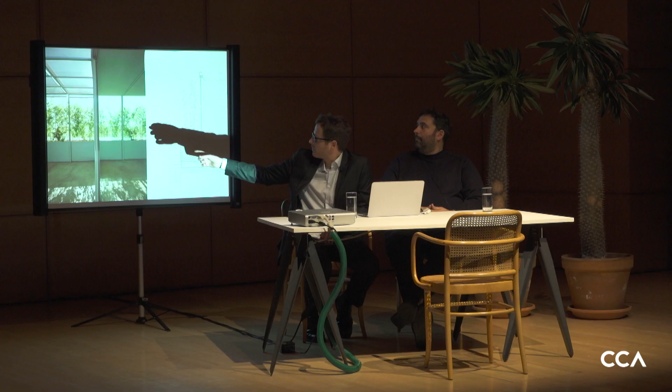Behind those plants is the pavilion I want to talk about. The pavilion sets back from the edge of the building in order to create a perimeter of plants that filters the light. We designed the same structural design for two kinds of places: this filtered exterior, and also a gardened interior.

Its simplicity puts it closer to a new version of the primitive hut, which is not built on the soil, but on the top of the city, in the middle of it, with no urban references, with no preset rules or use, just more like a natural oasis related to a new kind of hedonism.

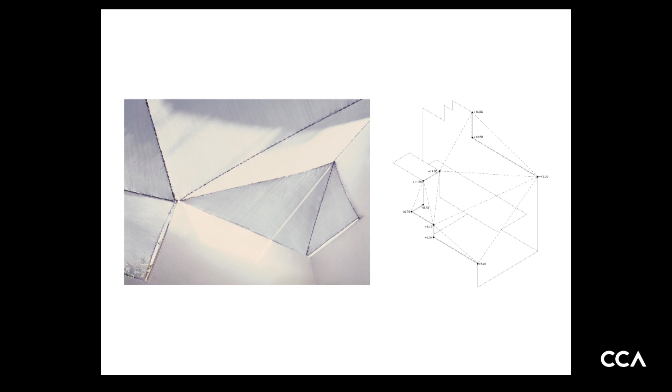Sometimes imperfect places like this discontinuity in the urban fabric can develop new opportunities. Again, what we see there is a new pavilion on top of an existing house. So we are not working on an empty plot, and we are not working with any precise use. We use a very malleable element to absorb every accident, so the discontinuity of the neighbor's wall stimulates the formalization of this shadow device.

This is how this device takes the higher wall, and we are trying to use the same attitude in the previous project relating to obsolete infrastructure. What we see here is an old water tank that, if we remove the top cover, we can now call a pool floating in the air.

This is how the city changes looking through the project. We as architects are able to build passive machines that produce momentary alteration of the weather. We don't need too much matter to do so.

We can create a breeze that goes over there. We can cool down the air. We can bring the vegetation humidity inside. We can do all that with very cheap materials. So there is a totally different approach from traditional construction techniques. It's not like building a wall and then adding a window. Here, the elements start to share responsibilities, and that's why they start to become lighter. We can have this totally glass room just because we have a shadow device on top of it.

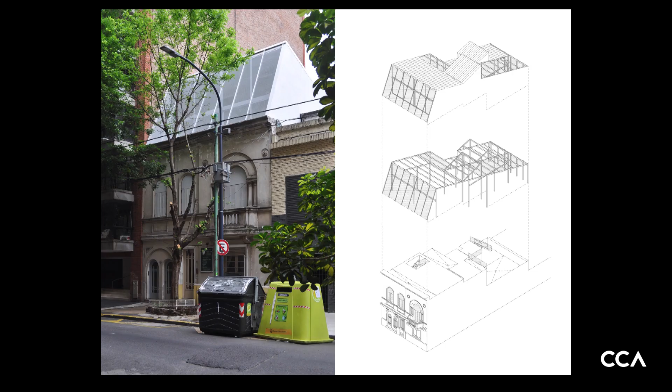So again, those are the plots I'm talking about. They are not expected places to build on, but sometimes you need to look for unexpected places to project unexpected ways of living. So this pavilion presents itself just like a ghost roof, a roof that the house never had.

So now our earth crust is the urban fabric. If you work on an artificial topography, you can find sloping new ground in pampas, extremely plain soil. This continuous and sloping roof that we see over there is a reaction to this condition.

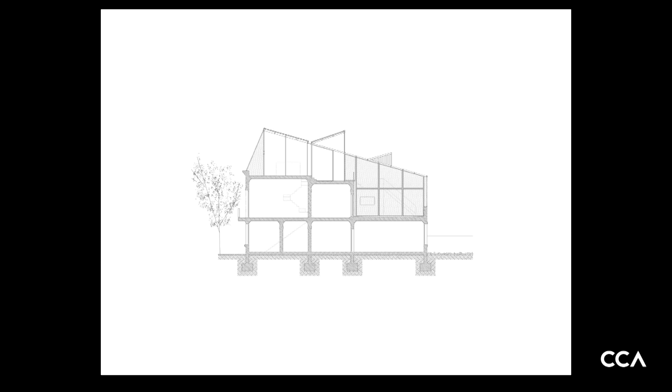Again, the typical house already exists, as we can see there. So we are only adding a big room with no specific use, structured by 3 patios: one on your left, another behind, and the third in front of us.

So this metal mesh and glass, the concrete floor, and the same steel structure tend to dilute the differences between interior and exterior, just to make you live floating inside the block.

So finally, when you manage to confirm the fertility of this new territory, and you finish understanding the hidden potentialities that it contains, it's time to look to the big picture again.

We believe that the air plots are key elements to develop a new kind of social houses. What we see here is a strategy that explodes the isolated housing block and prevents at the same time the ghettification. It's a strategy that promotes social integration through integration of different architectures.

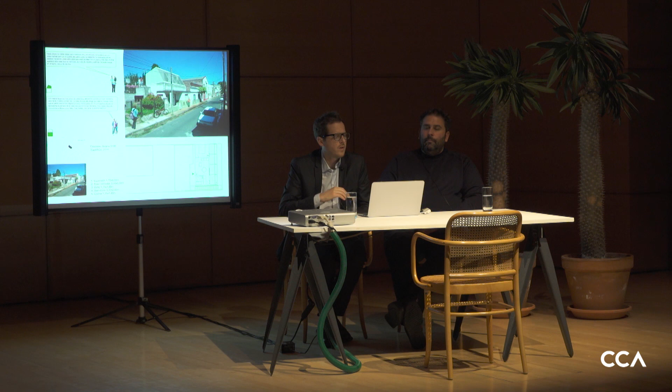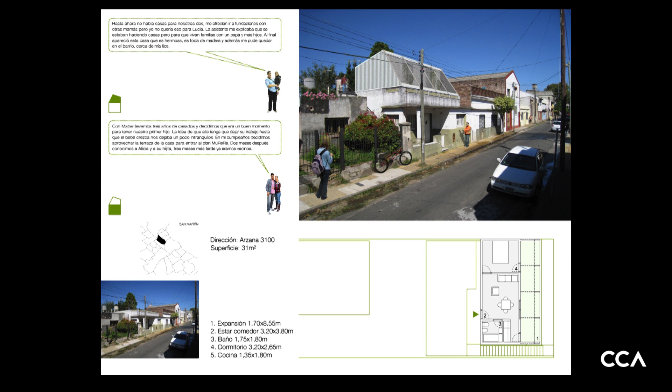Just like the mutualism in the Animal Kingdom, it's completely necessary to generate a new contract between the two parties, so the new inhabitants can be integrated into a consolidated social network, while the owners of the existing homes benefit from the air rights.

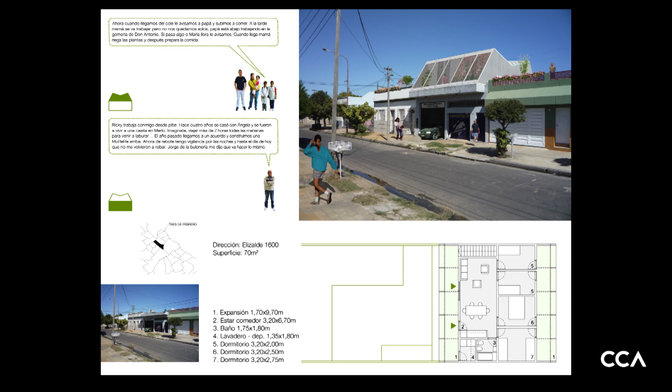Urban activity can grow by incorporating housing in service areas. You can see how the plants grow at the same time that the roof of the existing house grows.

Or the elderly can avoid moving from houses where they formed their family, by adding new life on their rooftops. As you can see in this image, we don't believe that social architecture really exists.

The architecture we propose here is identical to the previous one. What we do really believe is that there is a potential of social change in the detection of new territories.

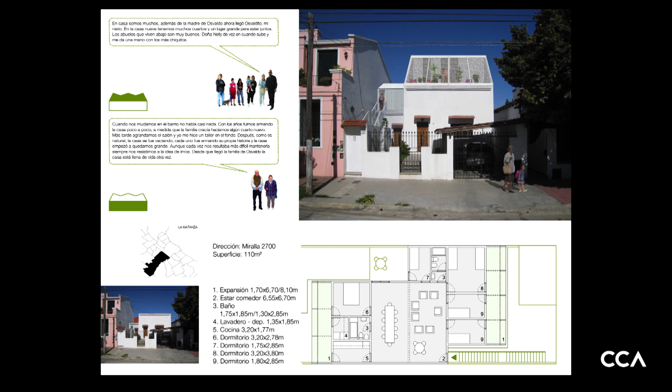Okay, so if the first chapter Marcelo was talking about is about finding new plots in the air where apparently there weren't, then this new chapter is about how we can find, or how we can subdivide and find new plots inside the other plots.

But for this to happen, you have to have some affections between the actors inside the same plot. So these two small projects that we are going to present can exist because of the solidarity of the families.

In these cases, the families were able to share part of their heritage with their children by contributing with a piece of land and with part of the needed budget. So here we are replacing the first initial investment with the contribution of the family.

As you can see in the neighborhood here, you can have a production factory in the ground floor, and then upstairs it's the own home of the family.

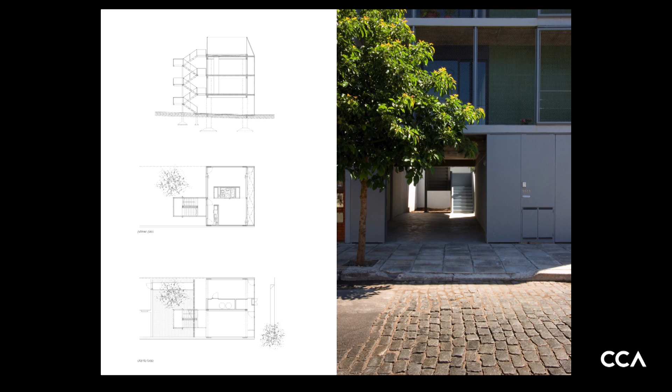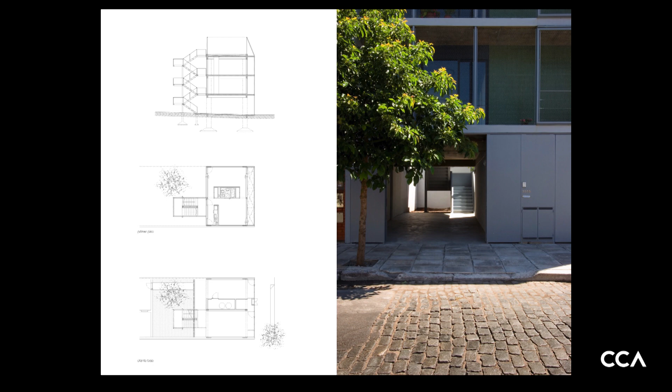So on the ground floor, they have a shared place with spaces for cars, and the place where people and workers go to the back of the plot for the factory. But also they have their lemon tree that was very important for the family.

This lemon tree was a micro landscape episode that was very significant for the family because they had their days below the trees because of the fruit, and that was for us like the beginning of a dialogue - a dialogue of form and a dialogue of colors and the atmosphere of this small courtyard.

But we also knew that for this construction, which was very, very economic, we had to build with a material palette that can resist long terms without maintenance.

And in other terms of economy, like this narrow building with this connection for the air - also the economy of means is always the best path to be economic.

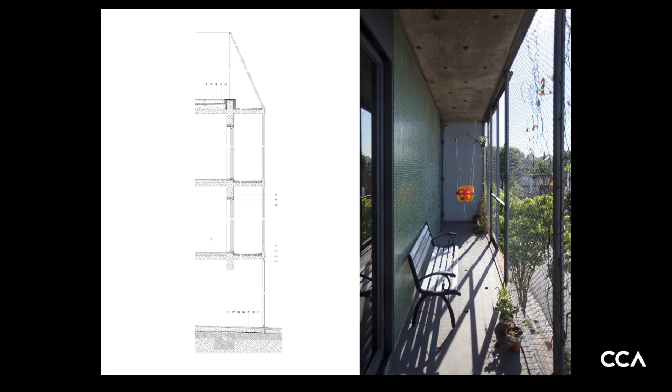In a similar essay for these houses that dialogue in a new plot, in an existing plot, is for this house, which in this case the new house is at the front of their parents' existing house, just where the garage was located.

In the house I explained before, there was a kind of critical situation because work and a factory live all day with a domestic life. In this case, it's how to live between two families that need to be together because of the contingency of life, but they also need their own intimacy.

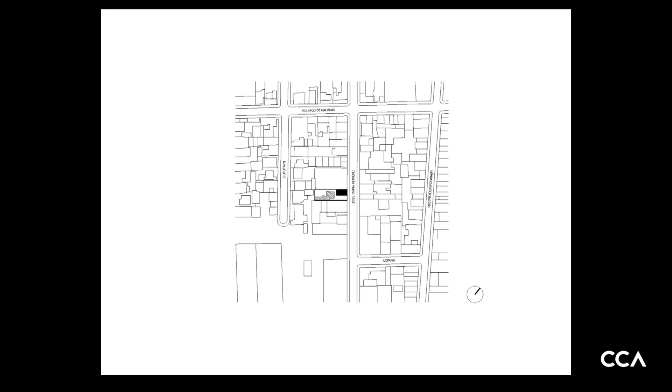So this is a typical suburban situation of Buenos Aires, where tertiary buildings coexist with big open portions of land and small houses. By rotating the new house, it is possible to conquer long and open views and connect the air delivered by this piece of landscape from the neighbor with the new house and its private courtyard.

So in the ground floor, they had this. They have some needs for a connection. Here, this is the existing house, and from this path, they can access both houses. Also, the cars stand there. But this is all again the piece of landscape that you can see.

It's like 4 meters by 8 meters. It's something very small, but it's very carefully and lovingly maintained. It's very important for them. So this small landscape started to structure their lives in the everyday.

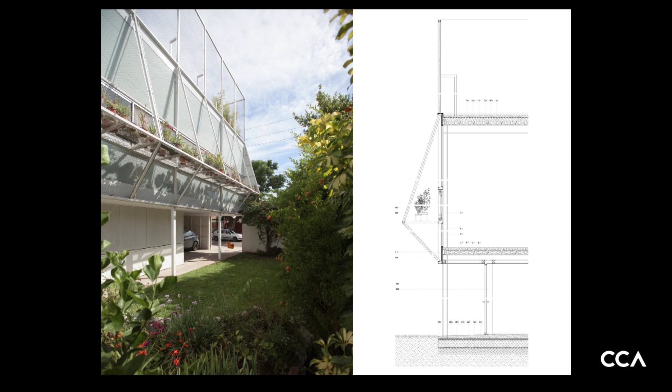So by elevating the new house, we also can provide some intimacy for the main rooms of both houses. So accepting the challenge and taking care of how the new building can join this ongoing conversation that started with this little garden. So again, very simple details.

And the interior of the new house is a big portion of air where the furniture plays a very important role to define how it is used.

And the big glass front is organized with two types of glass just to provide the required intimacy needed for both families.

Then again, in the last room, the terrace is an open-air observatory where both families can share an experience and rediscover their own neighborhood, this time from another point of view that was not shown before.

So, as Sebastián commented in the introduction, Buenos Aires is made of plots that facilitate its regeneration for various reasons that we are thankful for. There is a solid confidence of the citizens in their architects. So if you agree to take certain risks, you can participate in the construction of your city.

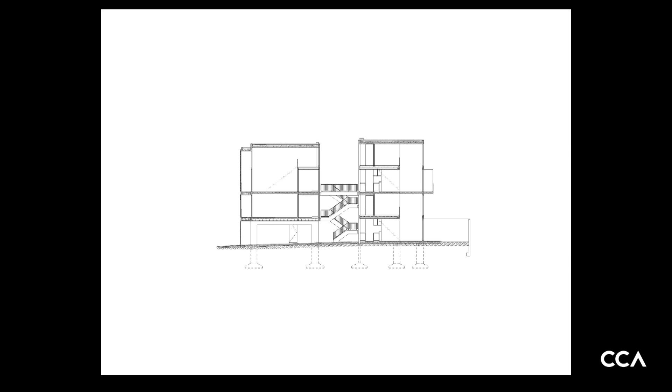What we do is, in this first one, we choose an area of the city where it made sense to build small units, units that were in tune with the small investors we were able to group at that time. It is a very simple and economical building where the first block rises and connects the street through a circulation patio.

The interesting thing about this method of work is that the first thing that appears is the project. The architecture then has the possibility of placing itself between your private agenda and the public's needs, using Richard Rorty's word.

If this balance of private obsessions and public needs is not 100% balanced, the construction of the project does not happen, or the architecture has no interest. This space speaks of this double condition.

Some can see here a parking lot, another a common ground in continuity with the public space. Some may see here a space for home or a place for working, while we only care about creating spaces that increase our freedom, unrelated to any specific use or any specific inhabitant.

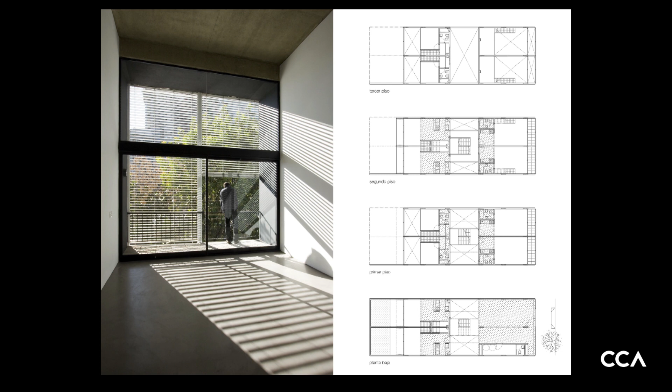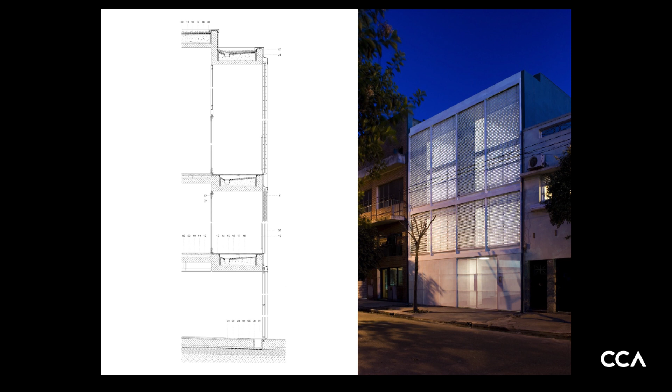We ask ourselves how a building of which we don't know its use should be presented to the city, or how this programmatic uncertainty can positively impact its formalization.

This is another kind of curtain wall. It's a curtain wall that has curtains in the front. It has glass 1 meter behind, with vegetation in the middle.

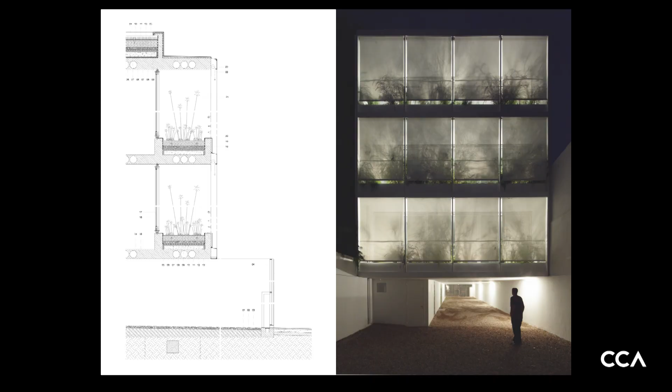The last studio that we did together at the University of Buenos Aires was called Workshop for Project Techniques. We believe that the project is a form of knowledge, that you can learn and use other architects' design techniques, knowing that they won't fit perfectly in your present scenario. So that little difference produces a small forward movement, always rooted in the discipline, but stimulated by the day.

So if at the end of the day, the only thing we are offering is a modified volume of air, how can we project the conditions of that interior atmosphere? So the design of the envelope becomes a key moment of the project.

So in this case, the shadow device and the vegetation are incorporated, so the air enters this room, lowers its temperature, and increases the humidity.

This programmatic uncertainty is opposed to a clear spatial specificity. For us, this is the condition to promote a creative way of living. Also from this point of view, the space organization is dramatically simplified. You can come back to it with a totally different perspective. For us, it's a shortcut to structure envelope.

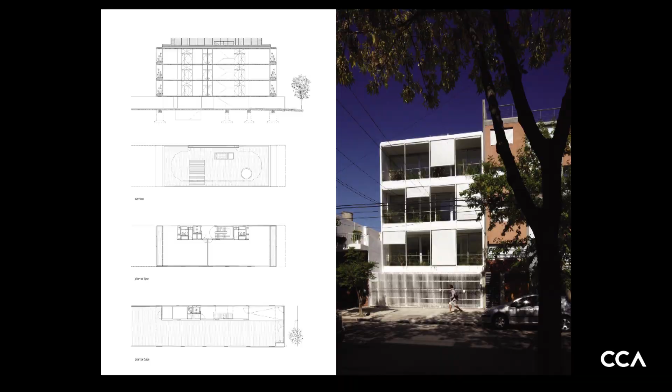And then it's possible to concentrate efforts on proposing another generation of buildings able to dialogue with the natural environment of the city.

So maybe this project is the crystallization of this agenda that we call moving from the mixed use to the diffuse. If in the mixed use you already know the cocktail of the uses of the program the building is going to have, and you have to develop design techniques to organize a complex building.

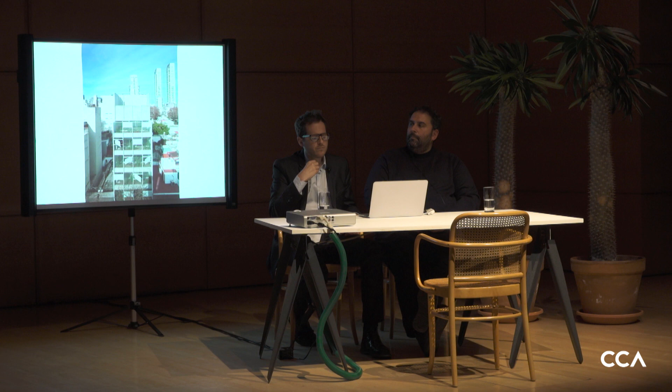The diffuse is a completely different thing. What you have to do is offer open spaces, then leave a creative margin to the users to define the final use.

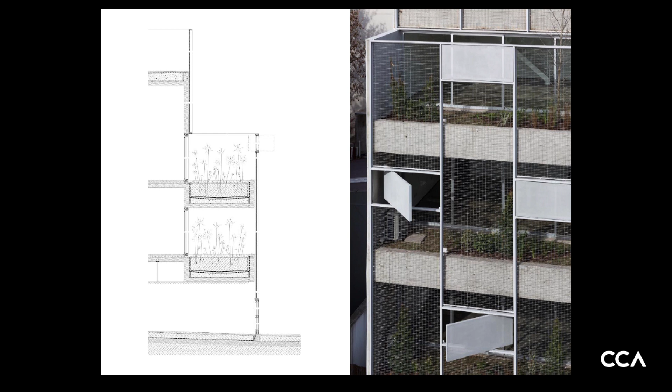This is a new version of the elevated gardens, now with 2 meters width. This is another version of a hybrid and ventilated curtain wall. This building is a collection of stacked rooms open to different appropriations.

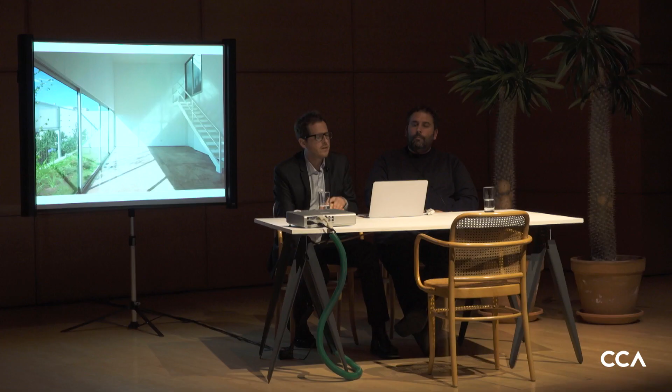This is one of those gardens and one of the rooms. So behind that permeable curtain wall, behind that elevated garden, and behind the glass, again, what we are offering is a big volume of air circulating from side to side, waiting for its occupation.

So the plan is organized in strips: the technical in the middle, the gardens in the perimeter, and the open space in between.

The roughness of these constructions changes radically when it is appropriated by its inhabitants. They can have a workplace like this, or they can dwell like this.

Another important idea from this point of view is that the furniture defines the use. This is now a house only because of the things we found inside.

But to do so, you have to offer big, unregulated open spaces. We have to step back a little as architects and let life, with all its surprises and contradictions, come inside our organizations.

This could be a typology evolution of the kind of building that Buenos Aires is made of. A more permeable one, open to different appropriations.

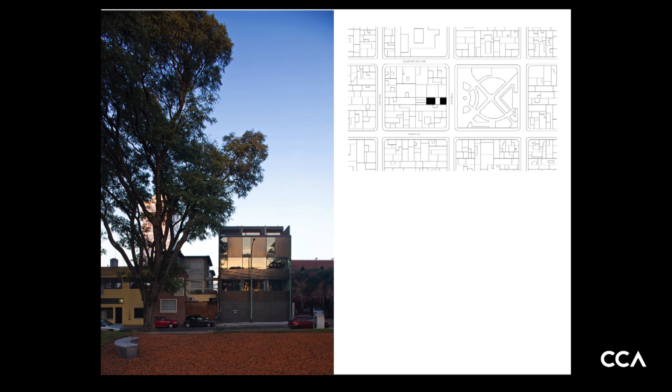Well, this is a typical urban situation: the existing neighborhoods with very good spatial and infrastructural conditions are growing and receiving new density.

So these new buildings share the street with single-family homes, also with attached houses, as you can see here in the neighborhood.

Although this new density brings the neighborhood a clear residential mood, here the typology of buildings Marcelo was introducing before does not fit. It's very different — this is a completely different urban atmosphere with different needs.

So the inhabitants of these buildings are people who accept this densification process, but partially, because they understand it's needed to attend to the growth of our civilization, the growth of the city. Of course they want to live near their work, and they know the city is the place to live, but they still keep the wish of inhabiting a house.

So this group of projects I'm going to show you is an essay about how we can build density attending to people's domestic dreams.

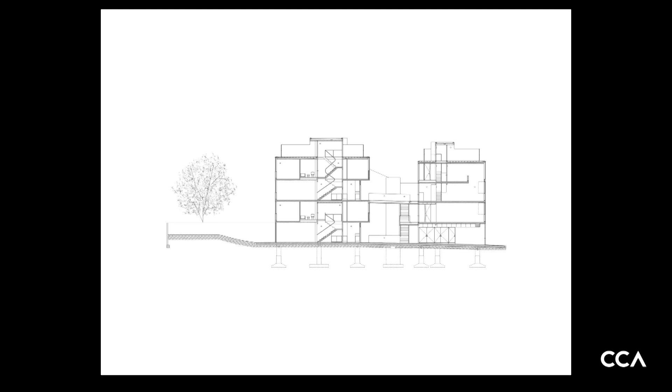The characteristic deep and narrow plots of the city enable the appearance of inner courtyards like this one, where the circulation of the building is shared with private rooms.

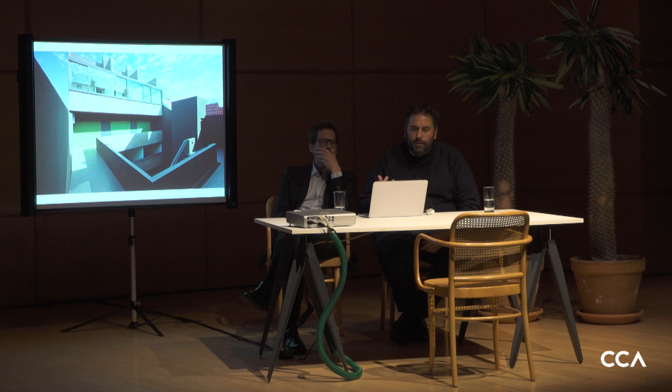This courtyard needs to be very well calibrated, because in this space coexist different programs, some very public and some very private, which also requires a living code between the users.

So the units are very deep and narrow, like the units of the Unité d'Habitation of Le Corbusier, but in this case with a double front and a connection of air through the units.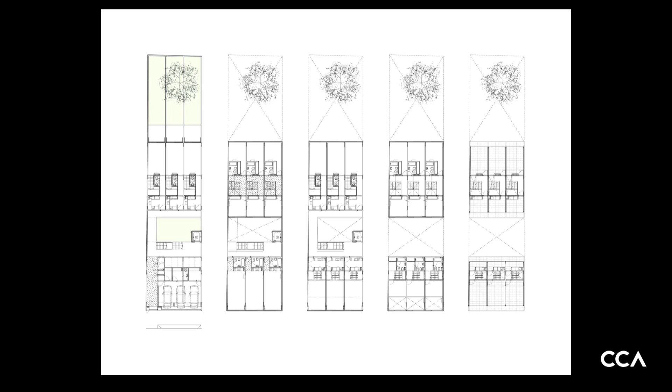And again, they have open vertical spaces that connect the inhabitants, but also the air and the views in this vertical situation.

And then, once again, the open air rooms where you can take a look at the city and expand your own private life.

But then the displacement of society from the banks and the private sector resulted in a very good opportunity for developers. So they took the lead on this, and they started to professionalize this trust, the fideicomiso Marcelo was talking about.

They introduced an intelligence of multidisciplinary teams with economists, lawyers, engineers, and they professionalized the system.

Of course, this is possible because the scale of this building is bigger, and because it also increased the scale of the budgets of the buildings.

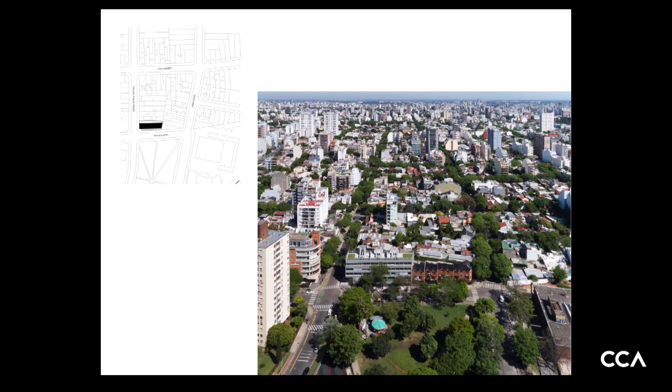So now the building takes advantage of being located in front of this generous public space, facing its main rooms to it, but also offering a compact building with a light and vibrating facade that works as if it were a backdrop curtain for the existing trees.

Always the trees and the building doing this dynamic dialogue. And the organization is again one single block facing the public space, and the section is divided again in the middle. But in this case, the houses here own the air.

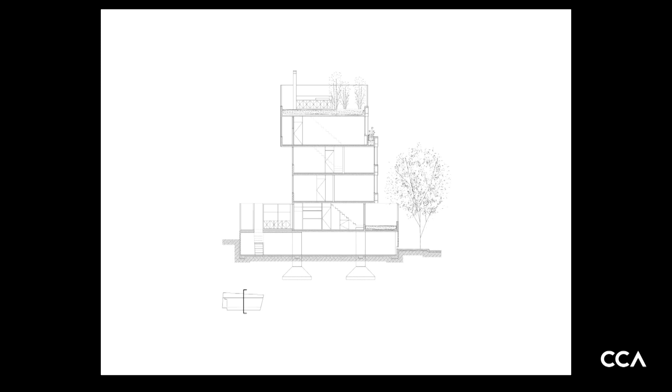But to have some more privacy, we elevated the whole building to have a connection for the lower houses. So all the units are organized to gain a diaphanous connection between the front and the back,

turning the interior into a place that can be understood as an interstitial space between the square, the public space, and the private interior courtyard.

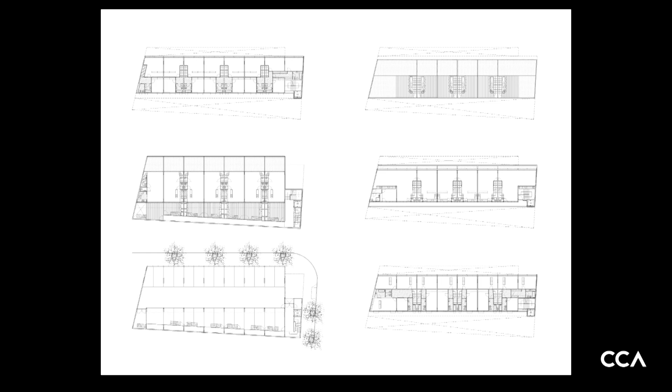Then the common spaces are reduced to their minimum, and the units can be understood as a sequence of layers, from their own private courtyards through the interior, then the green private garden connected to the public landscape.

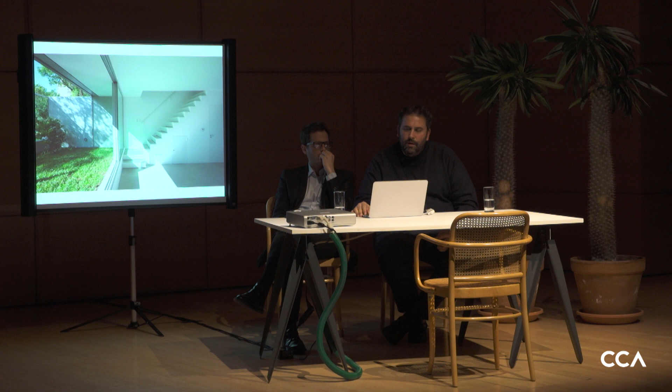Then all the glass devices are designed to introduce big portions of air into the interiors, but also slightly protected on the outside skin, to obtain the needed intimacy for the street.

As in the other buildings, with these conditions, when you're on the 4th floor you're just over the trees, and you have connections to the street just over the trees, but you always have a big portion of sky.

For the last project in these areas, it's a whole new urbanization that we were invited by a private developer to build as the first mid-density block of the development. The block is next to the existing square, the civic plaza of the neighborhood, and the main institutional building of the new city.

So instead of thinking of the block as a consolidated solid, we worked with a group of buildings arranged so that the central open space could be open and shared. Also, each building is positioned to build a specific relationship with its surroundings.

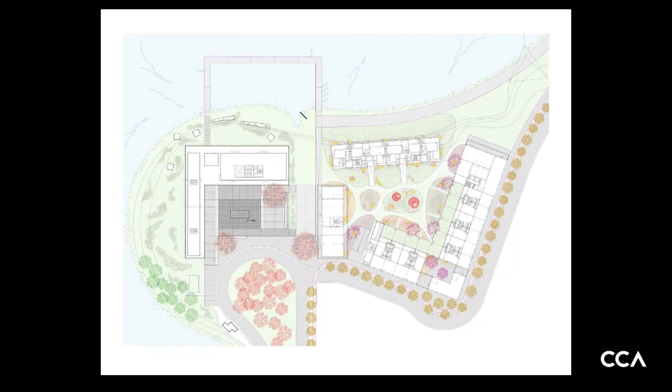So each of the three buildings is designed for a very precise type of inhabitant with different needs, different types of access to the units. The buildings are also an evolution of some other experiences we had before, like the diffuse project.

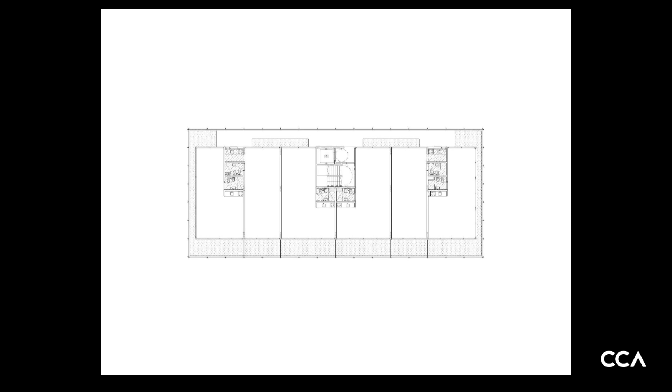Marcelo was talking in this case about the plaza building, that is all units connected from one side to the other, with a small core that can be modified to be just a small apartment or a working place, and the connection between these blocks through the garden roof.

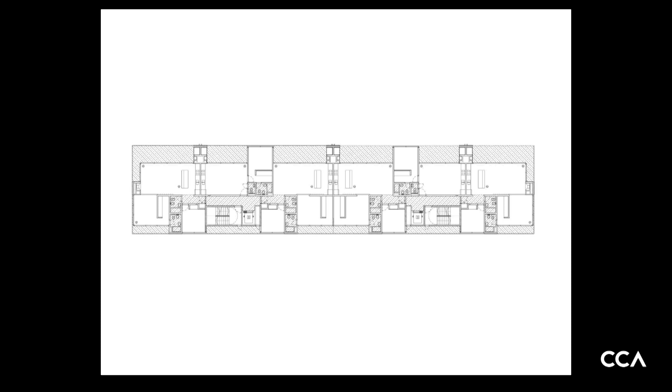And then the other building has apartments with a very big portion and generous expansions to stimulate domestic life in contact with the views and the landscape.

We always introduce some commercial and leisure spaces that are located to activate the use of the future public space. And between these public spaces, we have these small townhouses with public programs in the corner.

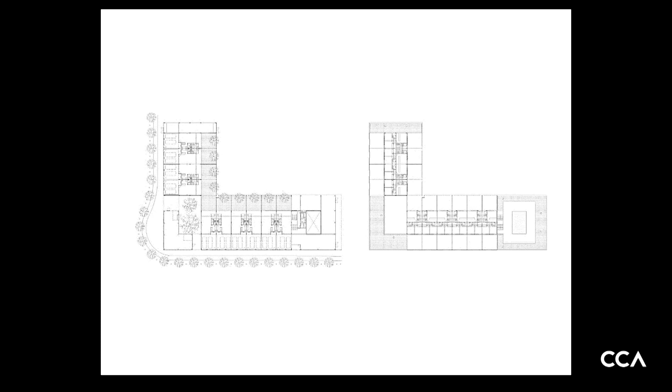So the buildings are, as I said before, a small evolution with some conditions changing the materiality and the details. Between them they have different materializations, so each building can present itself differently, but of course they are similar in construction techniques.

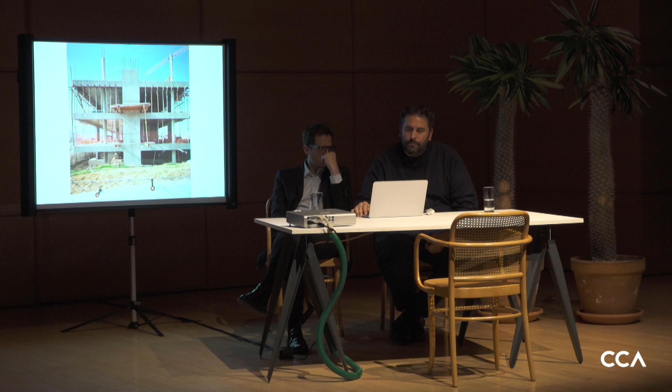So the second request that Lev made was to select a fictional figure to collaborate with. We felt that was a good opportunity to bring back a character we designed at the beginning of our practice, that we call the contemporary constructor.

We liked the idea at that time of the constructor, not just a builder, but talking about construction in a bigger sense, not just related to architecture. So it's a point of view that is at the same time cultural and material.

It's moving forward. So we'd like to finish this presentation. Sorry, there is a third question we are going to talk about.